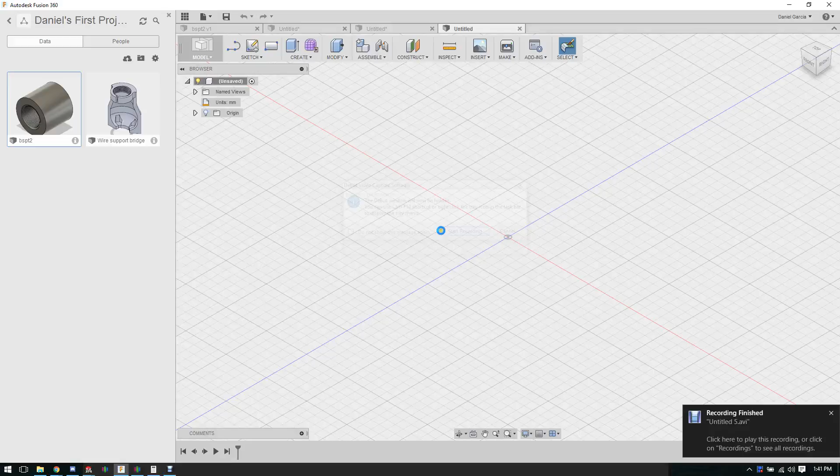All right, before we get started, I'm just going to show you real quick the overview of what I did. Really, all I did was create a coil on a plane and choose a diameter.

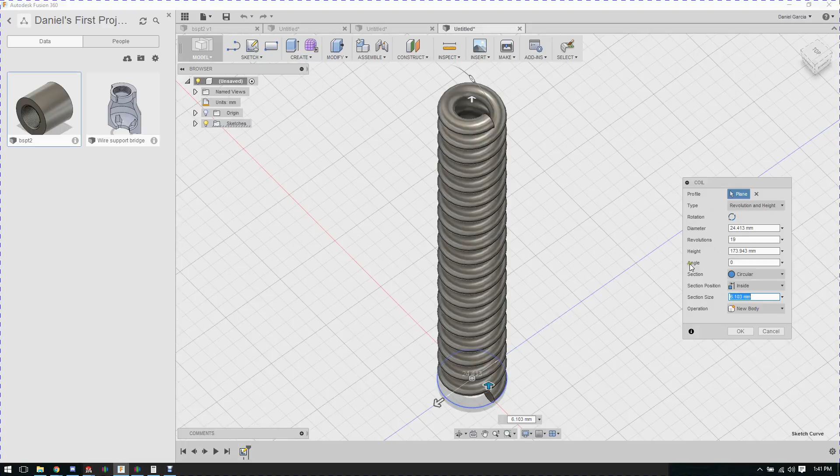And then you can tell this program to make triangular or circular profiles. You can give it angles, so you can kind of see where I'm going with this. Negative 1.77 is what we go with, and I'm going to be cutting in, so it's going to be the female thread. I want it to look like that when it cuts, like the negative space.

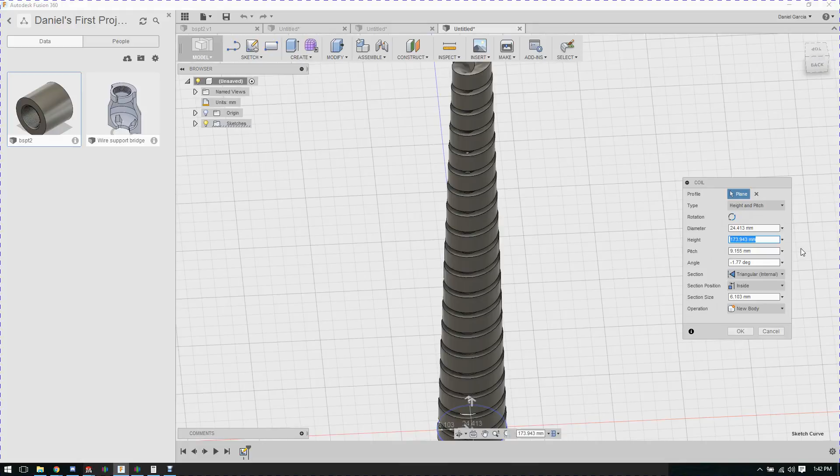And then I gave it a pitch, so I'm just going to make it maybe 10 millimeters, and then its pitch is 0.9, I believe. And then the size of the feature, we're going to make that about 0.9 as well.

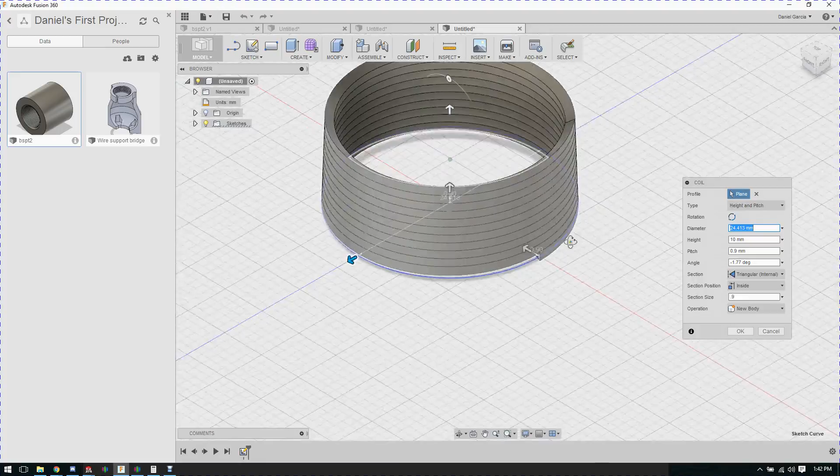And then I'm going to use that as a cut tool, because you can make a new body or you can cut into something. So now that you kind of know what the whole point is, I'm going to start a sketch here.

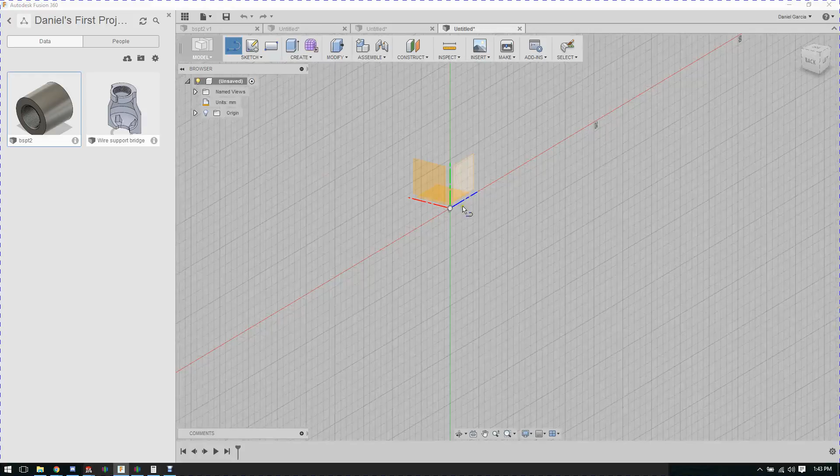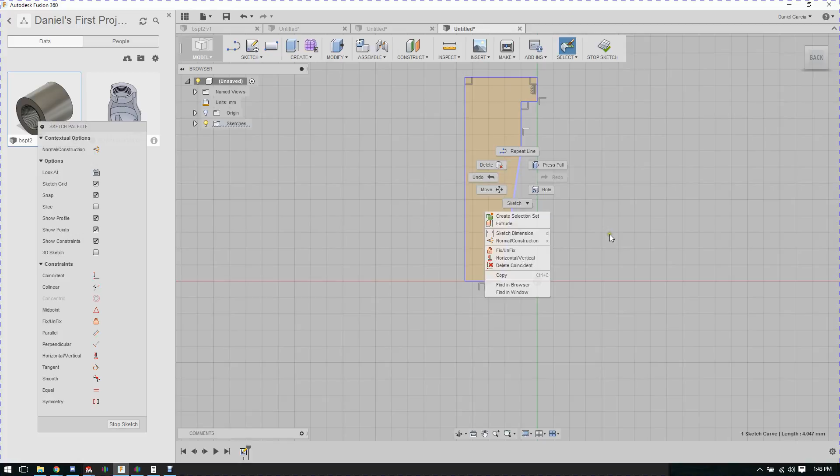How to make a revolved body starting. The idea here is that this line and the vertical are the arctangent of 1/16 divided by 2, because for every 1, it goes up 16. So we take the arctangent, which is opposite divided by adjacent. You probably remember that.

Come here to here. Let's say 1.77, I think that's what it is. Yeah, I did that earlier. 1.79 actually.

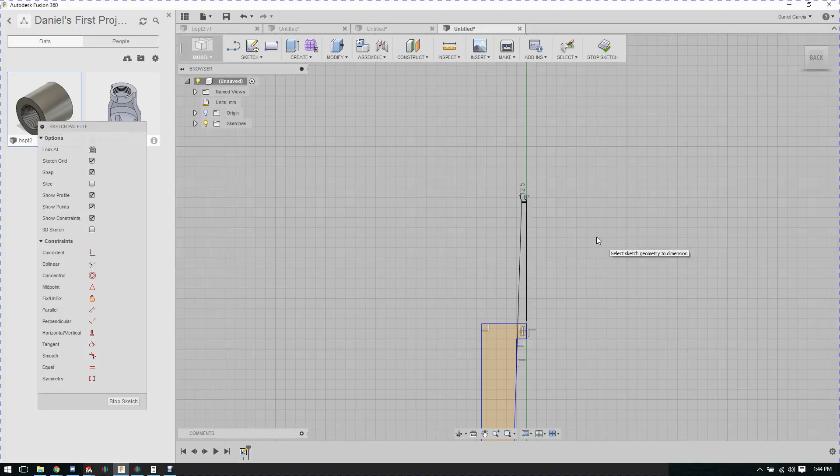I hate how this goes up here. We probably don't need to do this because the taper is so subtle, and this is such a hack that we can probably just bore straight by picking a size that's equal to in between the small and big diameter.

So we're doing a 1/8 thread, so that's between 9.7 and 8.5 millimeters. So we can just get in the middle there and bore it at like... I lost myself. No, 8.9. No, 9.1, 9.2 will be a good bore.

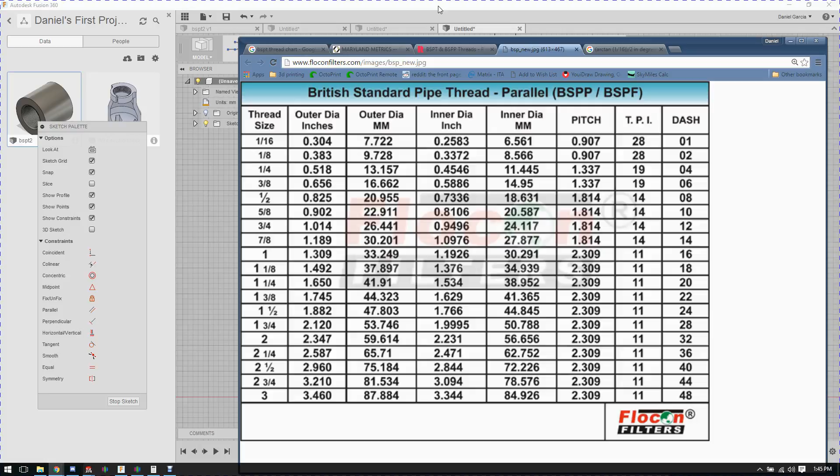Because we're going to cut into it anyway, and it's plastic on plastic. And we're going to go a little bit bigger because of FDM. So I just chose to go this way for now to show if you want to be more precise. But our big diameter is going to be 9.7, so we're going to make that 9.8 because printers.

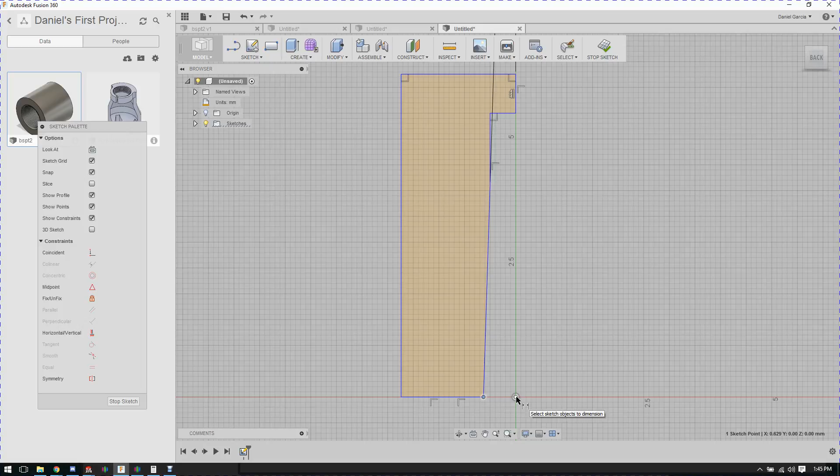Right, I think this is how you do it. 9.8. Fix my whole drawing. Great.

Oh man, awesome. This should be fine. Because this should be about, if this is 16, if I go from here to here, and I say 16.

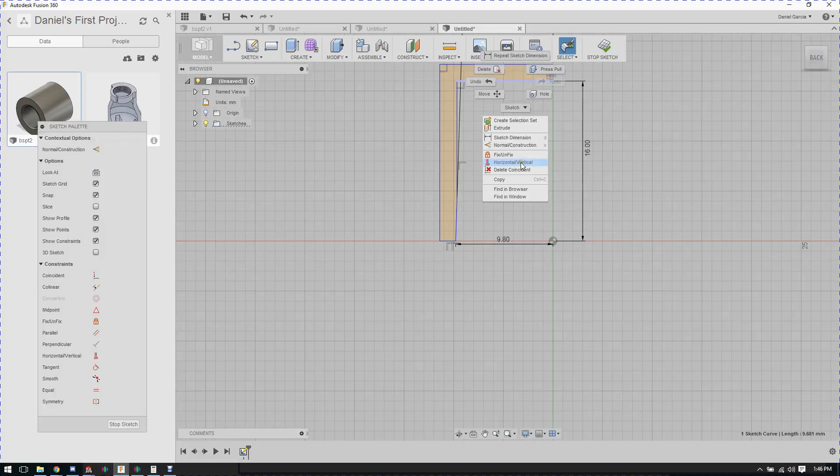And I break the drawing, of course. And this should be... not quite. It's only 0.2, it should be less. Anyway, let's stay there for now. I'm not going to troubleshoot that.

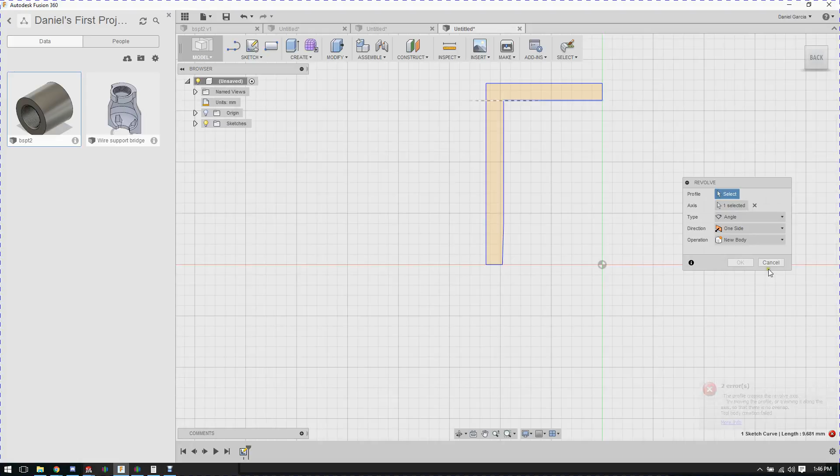So we do the revolve, along. Profile crosses the revolve axis. Okay. Give me a little hole there, whatever. I thought it was okay if it crossed.

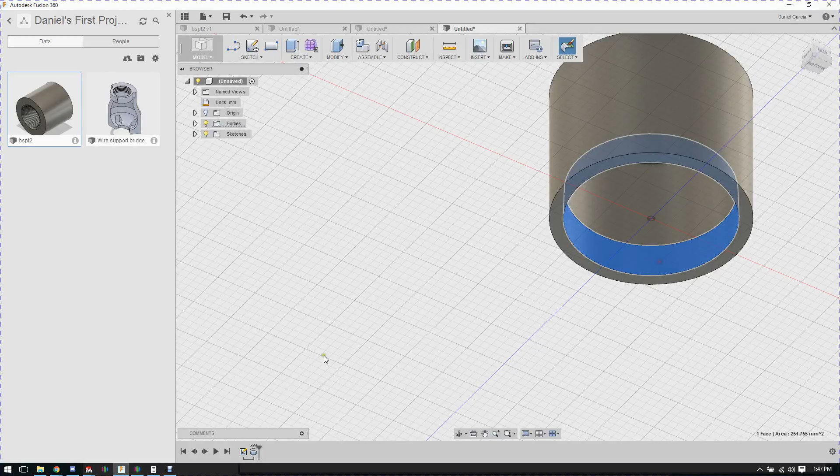There we have our part with our... I'm so bad at this. My dimensions.

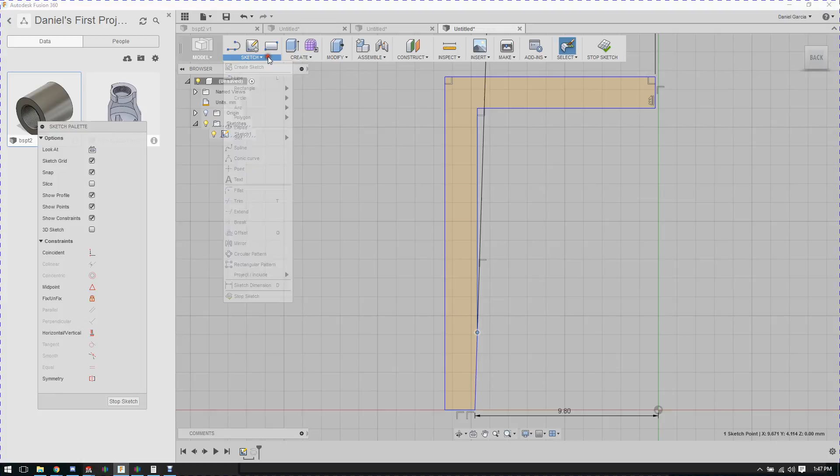Oh, this is why. It has to be 16 from here. Where's the tool for its dimensions? There we go. This is 16. There we go.

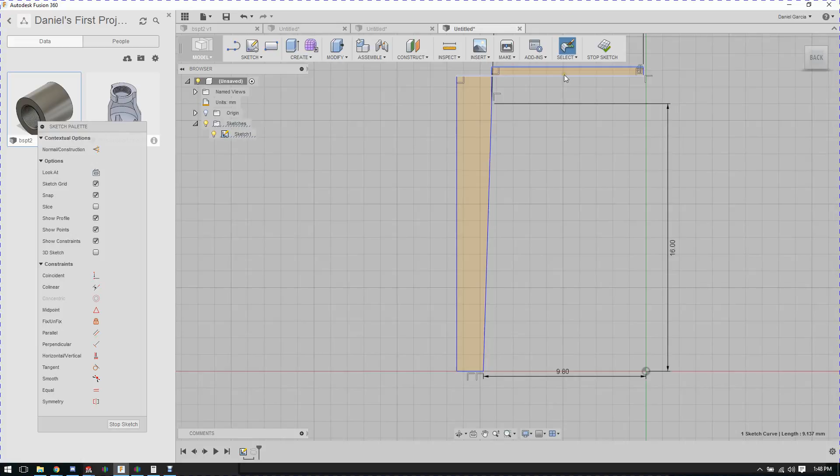Now this should be 8.9 or something, or 8.7. Not quite. Fuck you. Okay. Well, I'm sorry to Darcy. Hopefully she's not listening.

We go back to this revolve. Oh, here we go. Stop sketch.

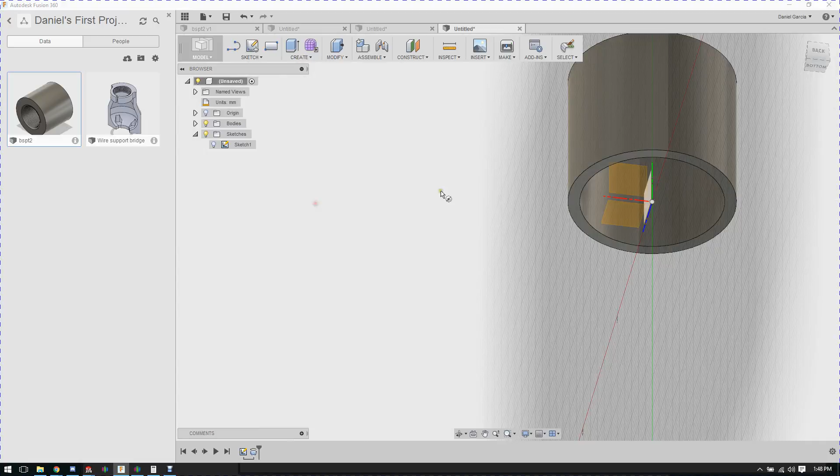Anyway, what I'm going to do now is come here, create coil, bottom plane, if that's the bottom. Come here to the diameter that we gave it, which was, what did we decide on? 9.8.

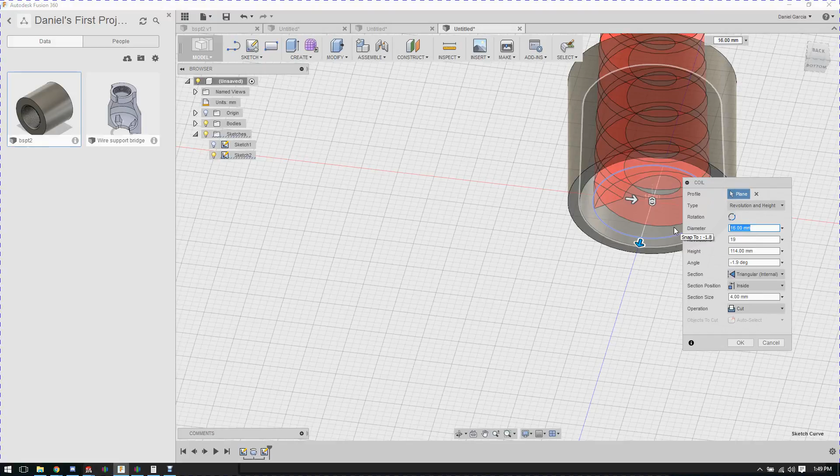So, wait, did I mess that up? This is diameter, but I told it it was a radius. 4.9.

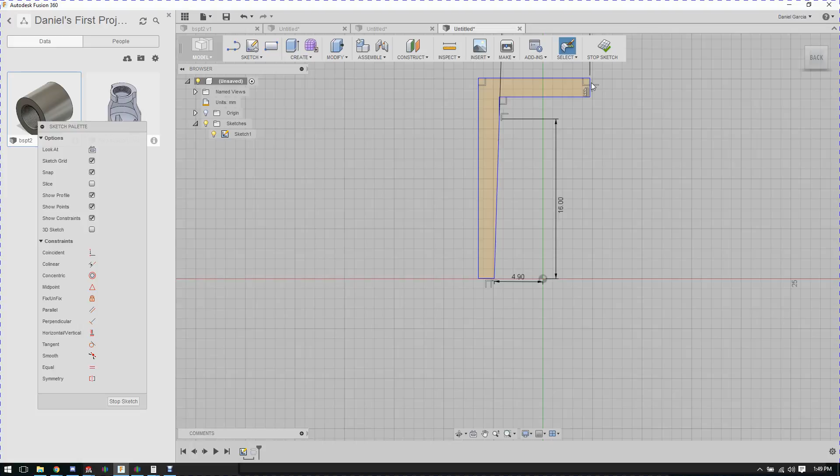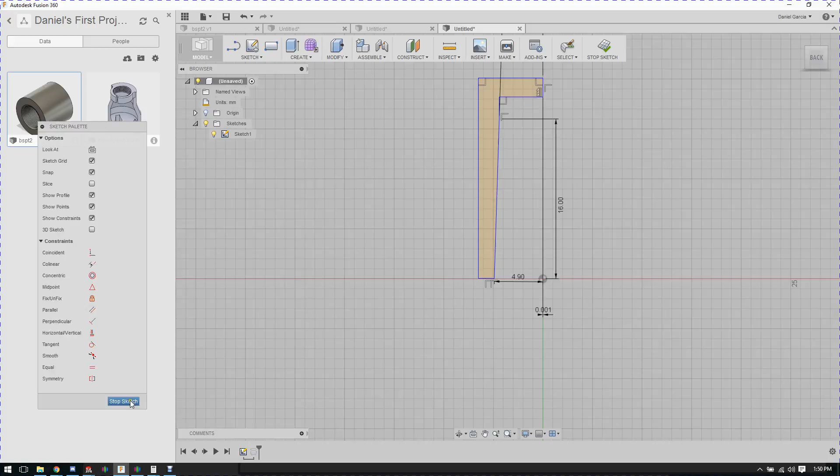Oh, the letter D does it. Sweet. Is there a way to make those coincident? Anyway, I'm sure there is. So we come here, exit, stop sketch. Okay, that's better.

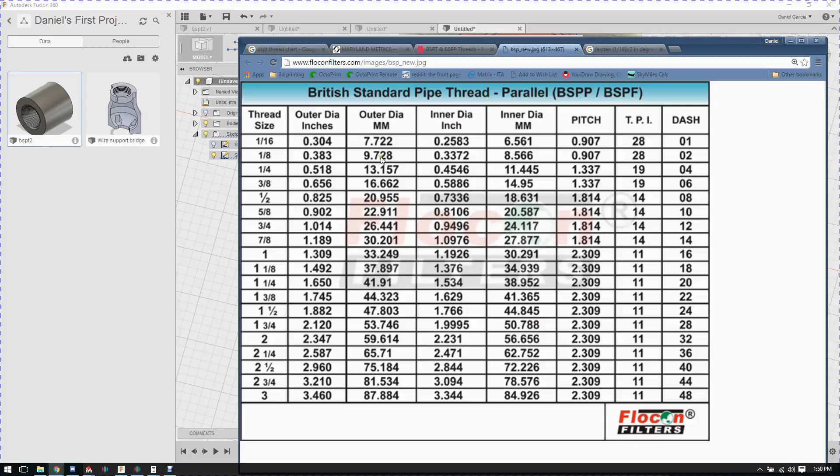We create our coil. Hopefully you can follow along this disaster. 9.8 diameter. I'm going to set height and pitch, so I want a height of 10 millimeters, and then let's say 14 millimeters. At pitch, look up the table. Our pitch is 0.907.

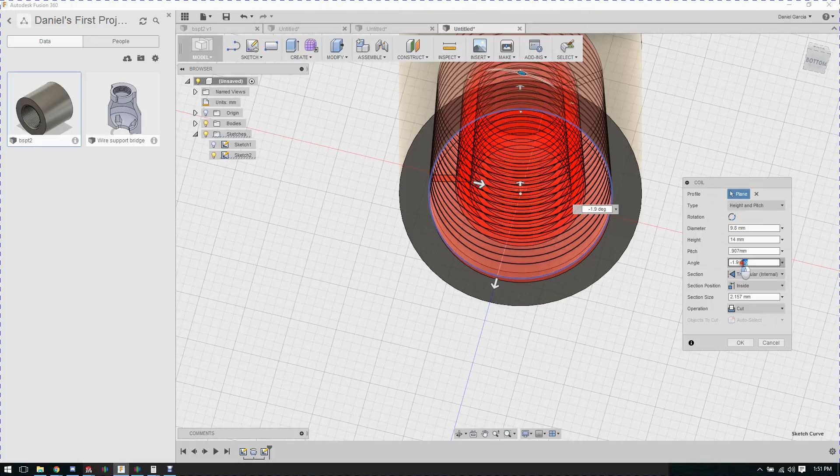The angle we decided on was 1.79. Okay, so here's where it gets a little bit tricky, because the section size is tricky - this thing only makes triangles, so are the triangles 1 millimeter like this, or 1 millimeter like this? I have no idea.

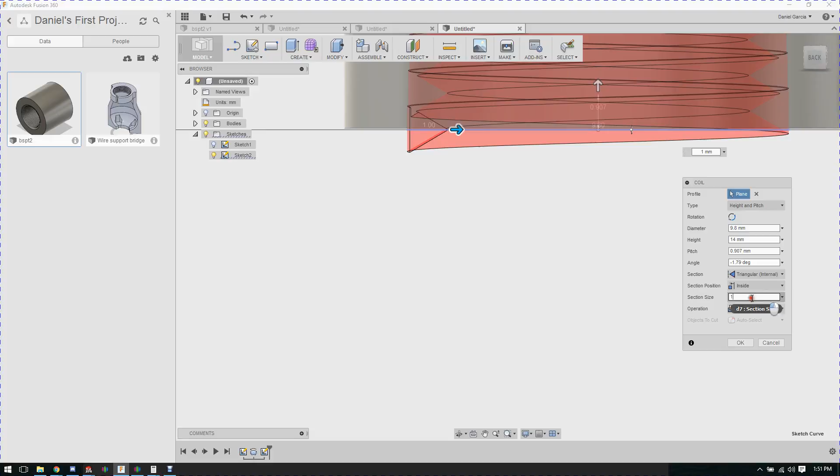So this should really be the pitch. But judging by how these things are crossing each other, it kind of leads me to believe... yeah, see, right here, it's like this. It's telling me 0.907. That's the height of the triangle.

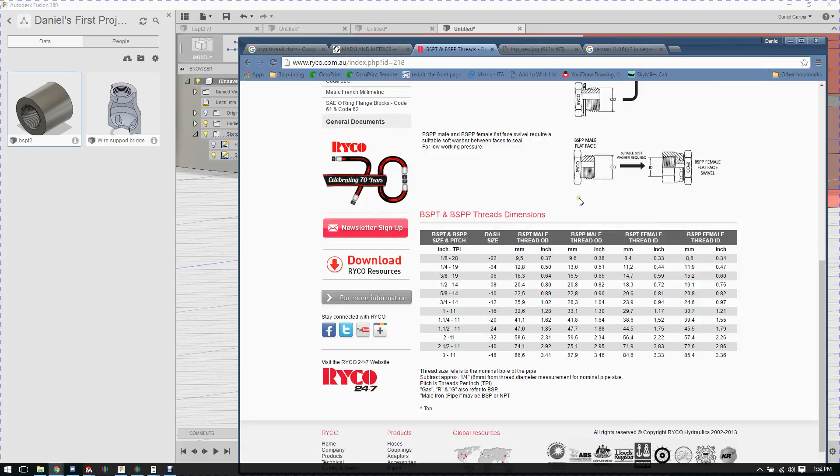So I could actually come here into my chart and say that D for 1/8... D1 to D, no, that should really be H2. H2, the height of the thread is 0.581. So we're going to do that.

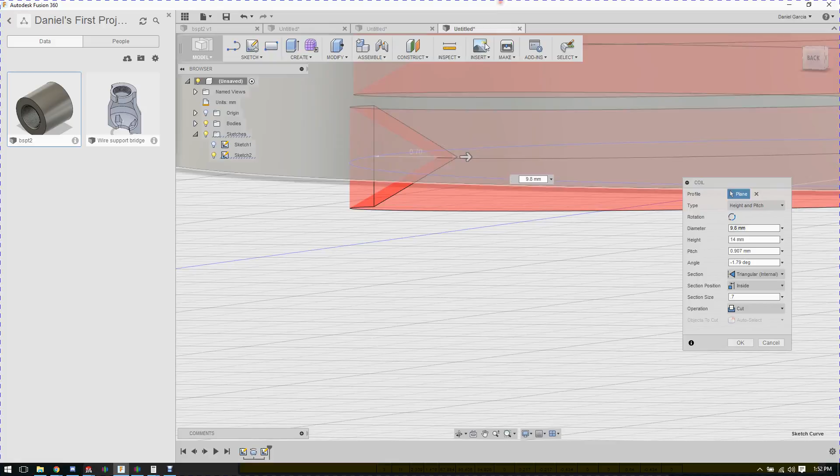Now, right now we're hugging the inside of that diameter, but we can tell it that we want to be on the center, or we can be on the outside. See? We want to be on the center.

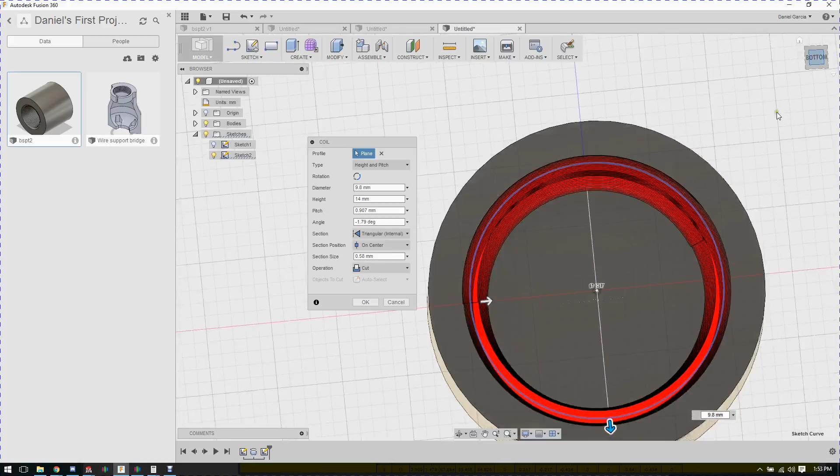It's going to be hard to tell which one is best until I can print this out and test it with a fitting. I don't actually have any fittings available, so you can play with this to see how you get it.

Everything looks good. We have the right diameter. I think I have the right rotation. Let me look at this. Let's do a new body.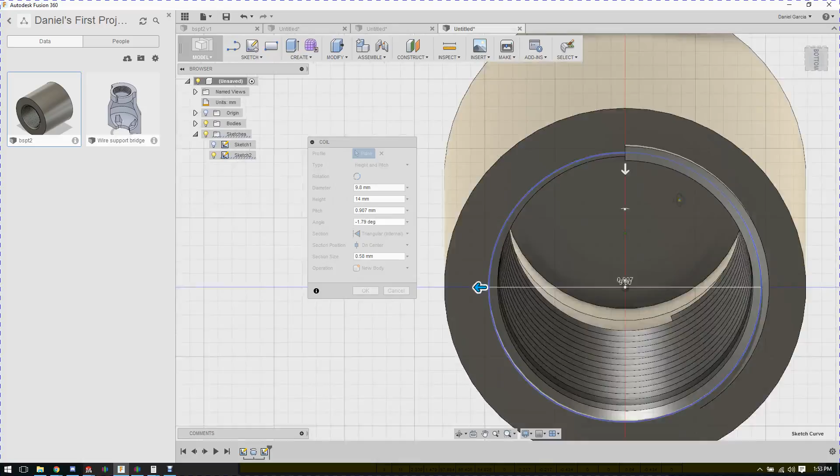It looks like something would tighten onto there, so that's good. Yeah, as I turn something clockwise in there, it would. God damn it. Yeah, we'll sink in. Okay.

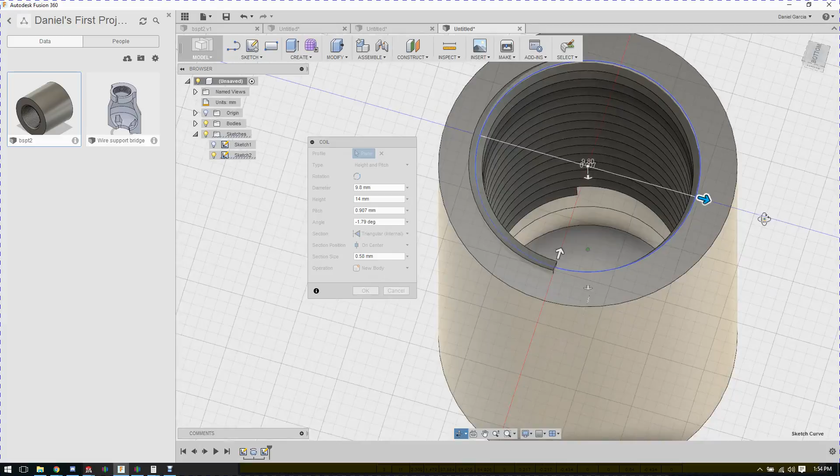We're gonna do a cut. You can also play whether you want to cut or you want to create a new body, that kind of stuff. Then press OK. There you have it.

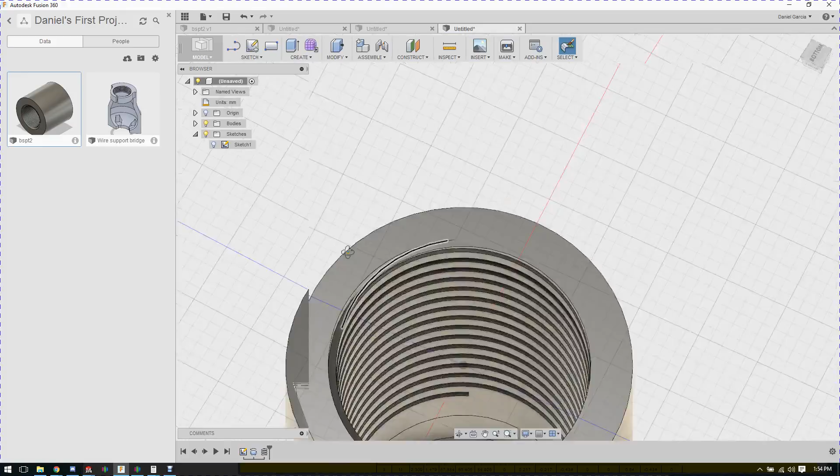Now, there are actually going to be some non-manifold sections right here. I suspect you could have one that looks manifold. That looks manifold. So this may actually print out.

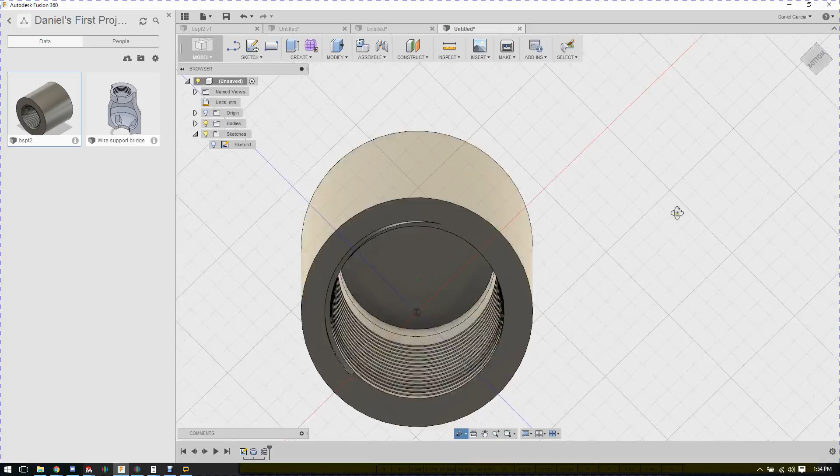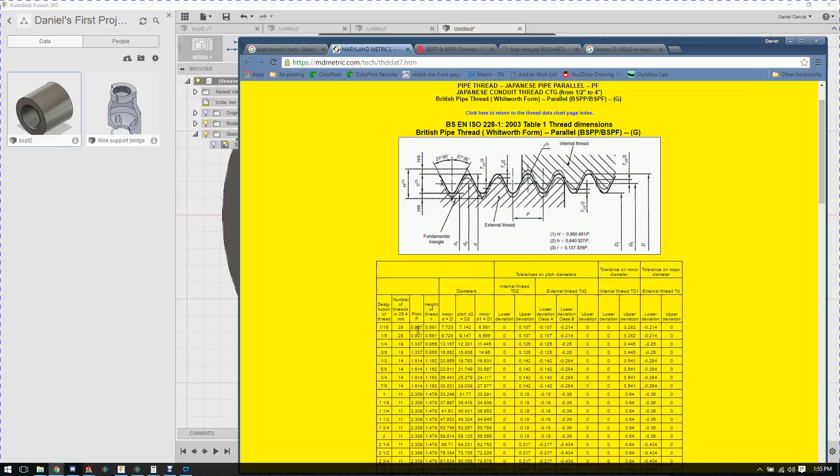And that's the idea. Now you have threads. This one looks a little bit tighter than mine that I did earlier, so I wonder if I screwed something up. You have to be careful because when you're looking at these charts, in the major diameters, you have to think of the diameter, but what I did was revolve the radius, so I may have screwed that up. But it looks about right.

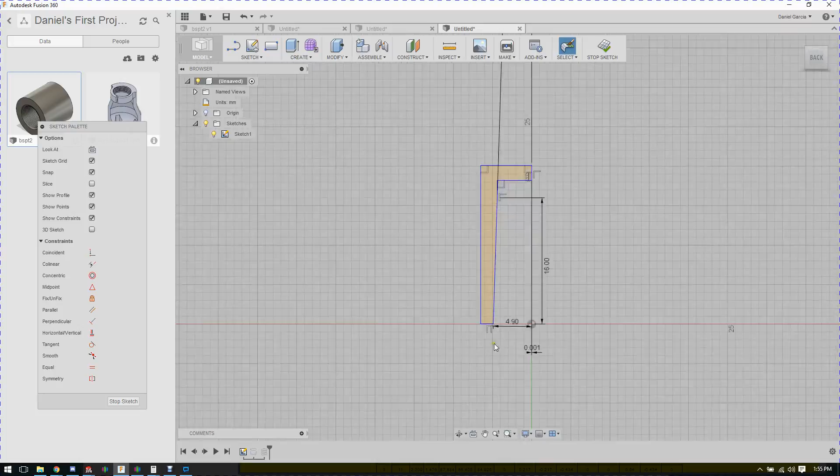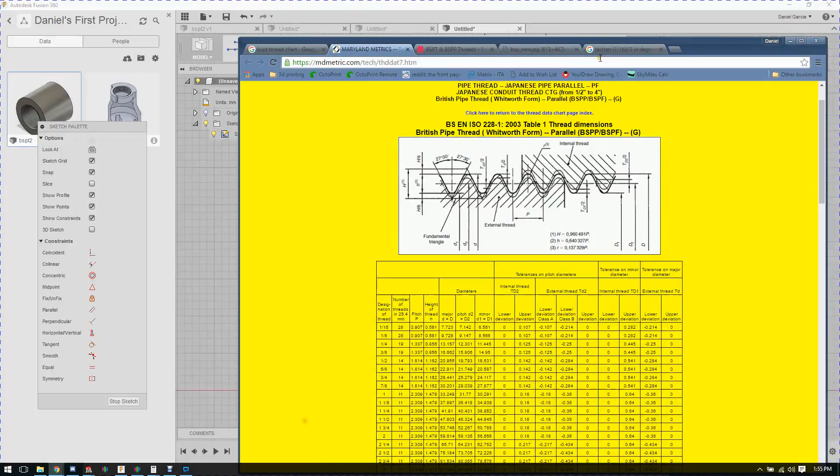Because if I come here into my sketch, I have 9.8 here, and then this one - oh yeah, 8.8. So does that jive? 9.8, close. We're close, so that's not too bad.

All right, there you have it. Magic. Also, it's hackish as fuck.

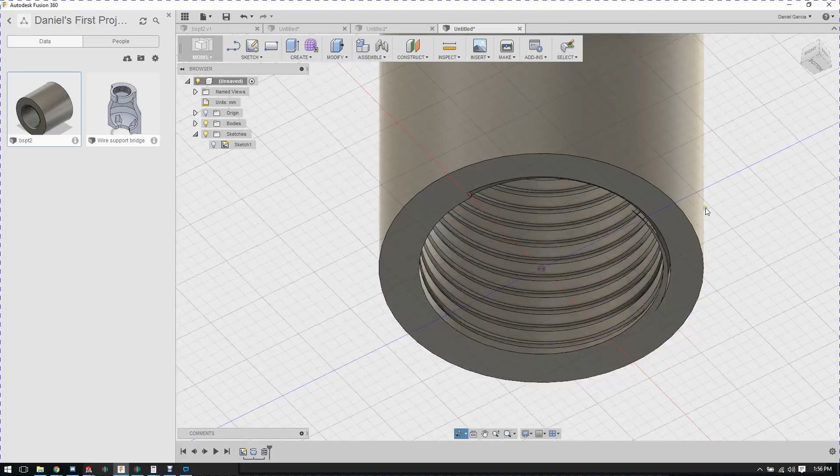I had another technique that was really neat for creating threads. What I did was... oh, that doesn't look manifold right there. Maybe it is. Maybe you can just slice the bottom half millimeter. No, it is manifold, it's just a little nugget.

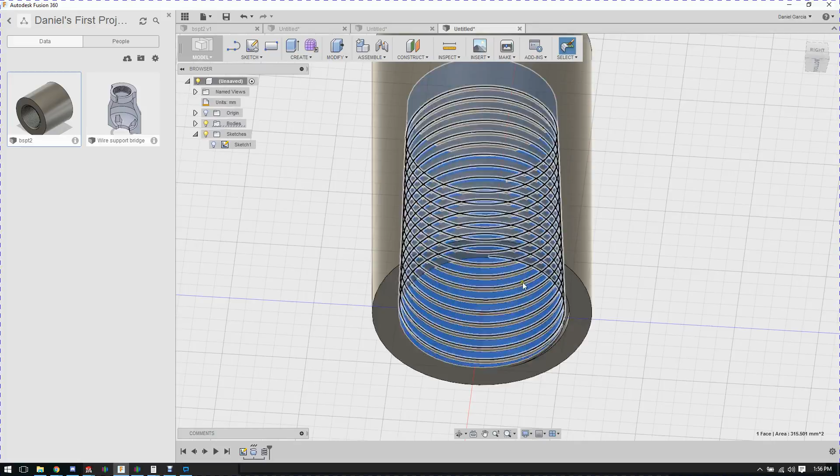I had another method that was really cool for drawing threads on the inside, but Fusion doesn't know how to handle a 2D profile well. So I drew a tooth. First I drew a triangle that cut a fine dimensionless line around the entire inside, essentially creating a spiral, a one-dimensional line spiral. Then I came here and drew a tooth.

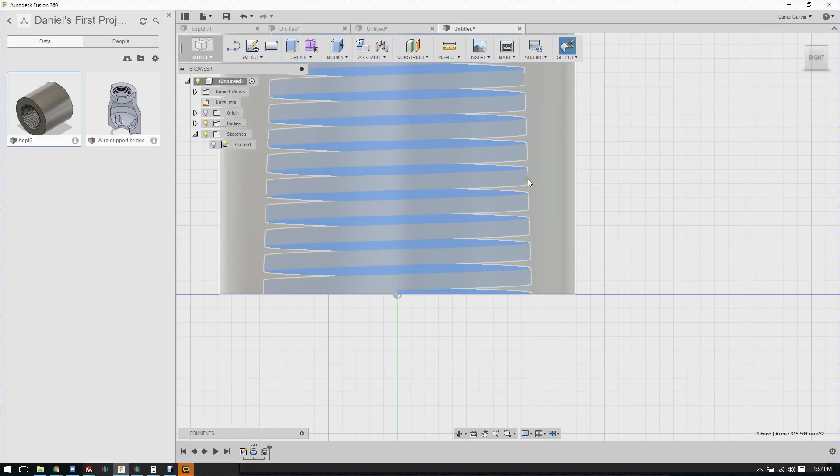I actually drew a tooth like this, gave it the right dimensions, and then started cutting around. But as I started following the helix, the polygon would actually rotate, so it would start doing these weird things, kind of like a roller coaster. I couldn't get it to stay straight, so this is the best we have for now.

There's probably a better way, but I slept like 3 hours last night. Alright buddy, I hope this wasn't as confusing as it seems to me right now.